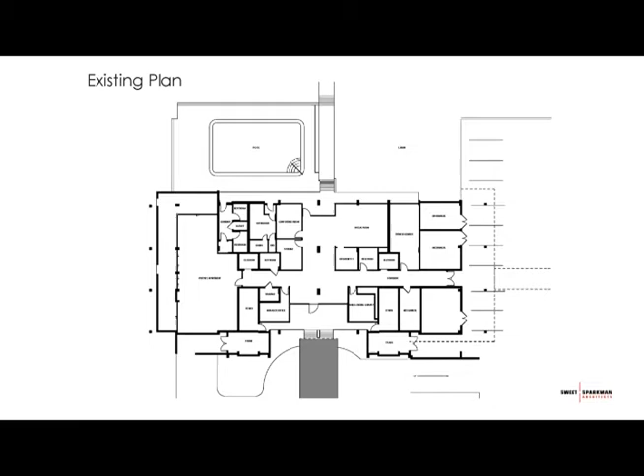So this is the existing floor plan right now. We are in here, in this room here. And what we noticed — the first thing that we did was really look at the property as a whole. Before we start working in the lobby and the areas that were going to be the first phase of the project, we wanted to look at the project holistically.

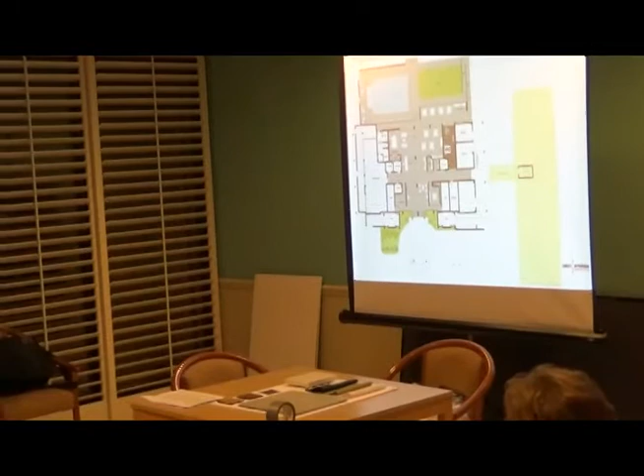Some of the things we thought we would do — you mentioned this in your consensus project — the covered area, probably painting that so it didn't look like so much of an addition, but started to look like it was part of the original building. The connection right now is a little bit temporary looking, so we want to do something more permanent, connecting the carport to the north side where everybody comes in.

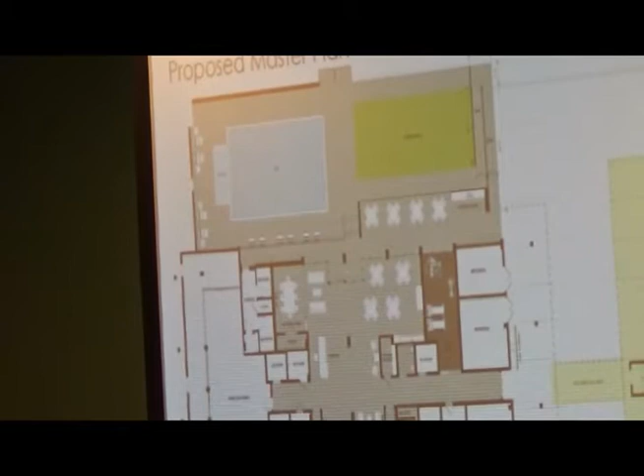And then we look to capture and make better use of the pool deck and this grass area right outside here, which is really underutilized right now. We would propose that maybe someday we turn this into an area which can be used for exercise, sunbathing, sunsets — so this could really be a more functional multi-purpose area.

We also saw — that's my New York, excuse me — we also saw the opportunity to get some outdoor seating, which would sort of connect the inside to the outside.

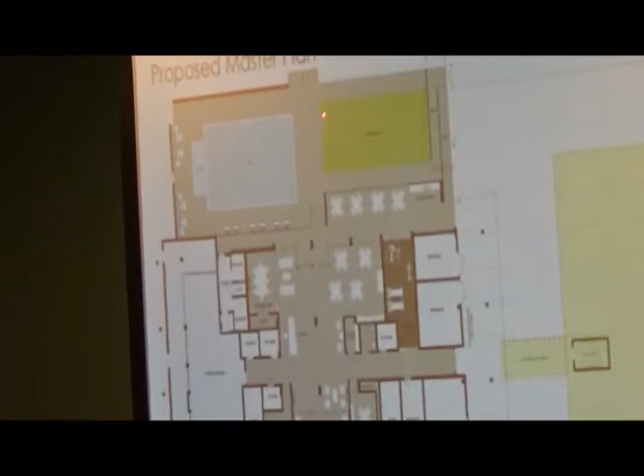Once again, we wanted to make sure the whole project is universally accessible, so we wanted to make sure we had access from the lower deck to the upper deck. We're also providing a ramp here to access from the lower to the upper, with an outdoor kitchen.

So these are all things — before we really started studying the interior of the space, we wanted to make sure we were looking at it holistically.

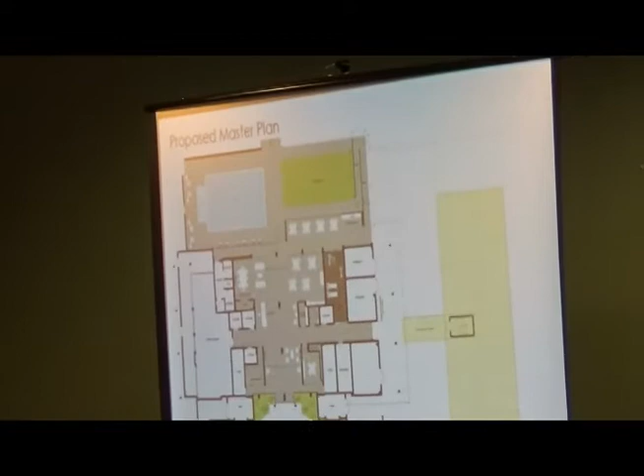Landscaping was also something that we looked at, and we would propose that maybe we do improvements to the landscaping out here in the drop-off area at the wall. We spent a day with Barbara Mims, and we walked the site, so we feel like we better understand what works here at Embassy House, what doesn't work, and maybe some ideas for future landscaping that complements the architecture.

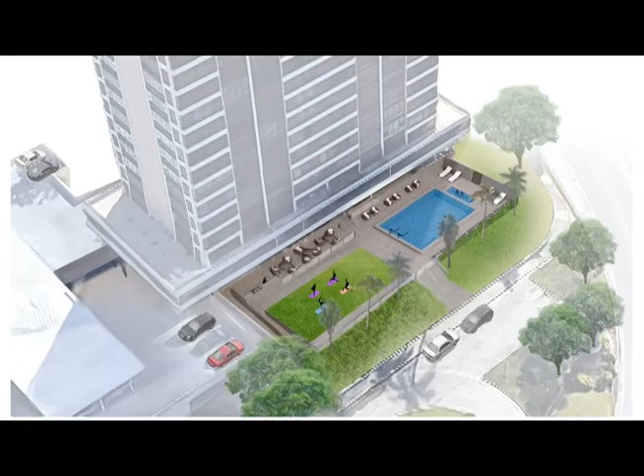So this would be an aerial view from the west. This is the existing pool. Perhaps in the future we do improvements to the pool, perhaps we add a spa, or an area here with grass where we can do yoga or sunset viewing, a multi-purpose space, so we can capture the use of that.

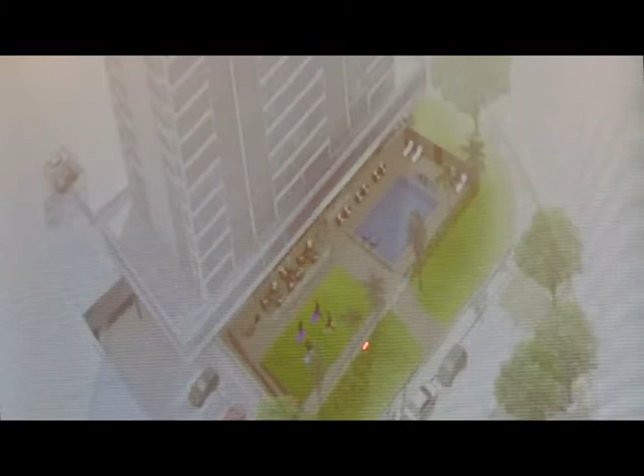We're also looking to enhance the security. Maybe we provide a gate and a fence along here, and maybe there's a glass rail here so we get views across. The road here is lower, so you'll get unobstructed views across to the sunset, to the water. So that's what we would propose.

Here's that seating that's at an upper level, but the same level as the lobby. And then this is the connection that we're proposing, which would be very similar to the connection on the east side of the building, the carport you have right now, which is very straight, sort of mid-century. There's no swooping curves or anything like that. It's all very orthogonal, which is very indicative of the mid-century modern style. So we would suggest that we try to take the architecture that was originally done and match it with some of the other amenities we're proposing.

Once again, in the future, this is just something that we looked at when we started the project.

Like I said, we met with Barbara, we toured the landscaping. We know what works, what doesn't. We know it's a harsh environment here because of the wind at your location. But we would also suggest that maybe we start looking at some other plantings. We know that variegated ginger works very well, lady palm works very well. But we would propose that, and we have some planters which are more indicative of the mid-century modern style of the building. So these are just some suggestions.

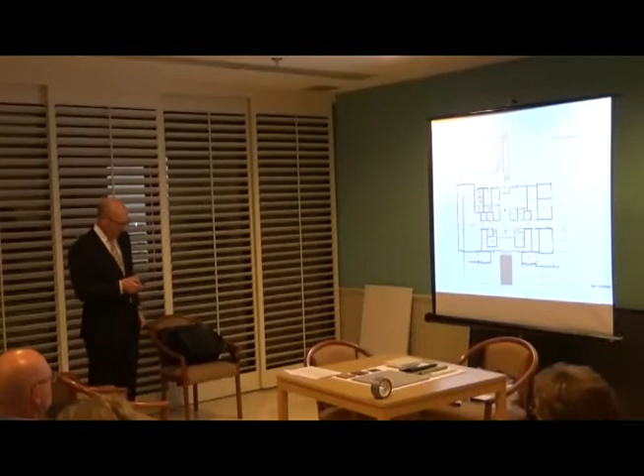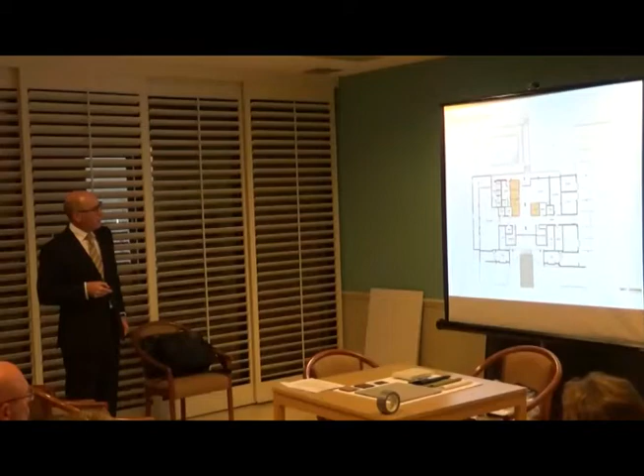One of the things we saw in your consensus report was you wanted a clean, open, modern feel. We thought the greatest attribute, when I first came in here, was the view directly to the west, and we thought what was really pinching that view were these rooms here. Because when you walk in, you've got this open space, but then it narrows down very quickly with what is the kitchen, which we came to realize is maybe an underutilized kitchen, and then a storage room. And then there was this area here which was not used at all.

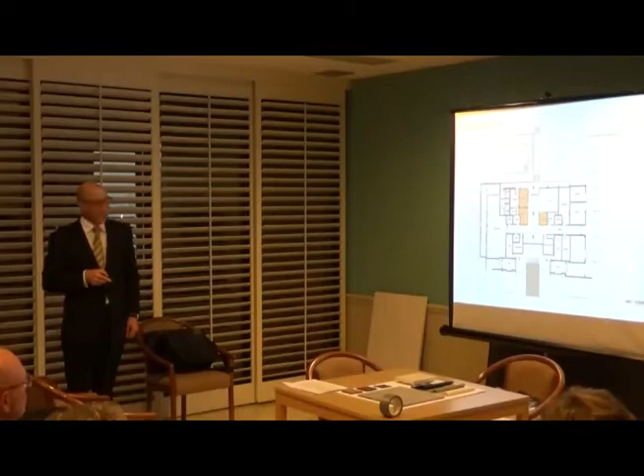That's your pool bath, which you did a nice renovation on, but this area right now is vacant. We're going to take over that space and utilize it, and we think we could move some of this space into here, with the idea to really open the lobby up, make it feel much more open than it is right now. I think we can do that by removing some rooms and finding other locations for them, or making them just slightly smaller rooms that you don't utilize as much.

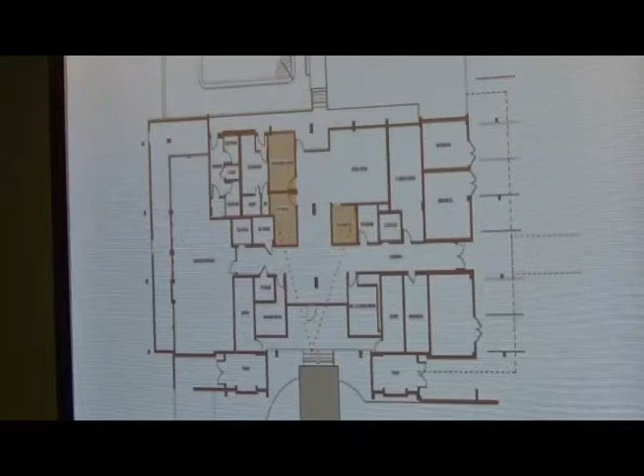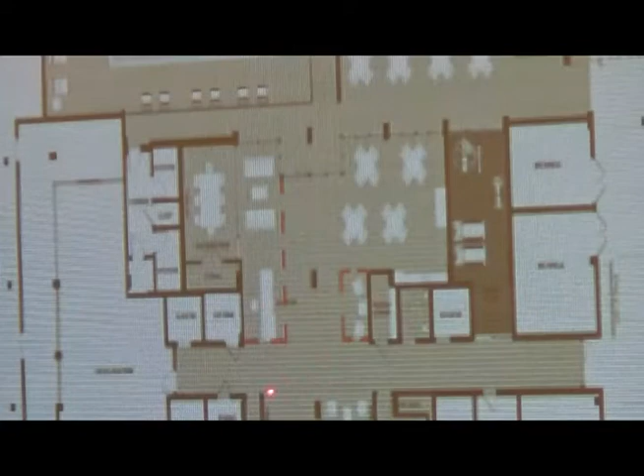This is a floor plan, and the red dashed lines show what those spaces were that you had, and we're going to open that up. We would propose to open that up and create, maybe move the reception so it's not right on you when you walk through the door, and it's floating a little bit so you can see past it. And then we have more seating areas, just informal seating areas.

So that would become your view. If you see the red lines, your view would really capture all that glass which is currently here. So when you walk in, you're immediately going to see the water and the sunset and everything, instead of looking at the back of the kitchen. Right now, if you look through that glass, that area here is the kitchen, and this area here is the storage room. And you get very little view of the outside to the west.

What we would propose is that same view, your same angle. Here you're coming up the stairs, and here you're coming up the stairs. We removed all this, and we removed all that, and now that's what we really want you to see, is the view across the storefront that's here.

What else we would propose is to change the flooring material. Although I like polypebble, it gives you a dated look. I think the other thing we want to do is go from inside to outside. That's a real tenet of the Sarasota School of Architecture, to blur the lines between inside and outside, so your view and experience flows from in to out. That's what we're proposing: we'd take the flooring and run it outside to the east side here.

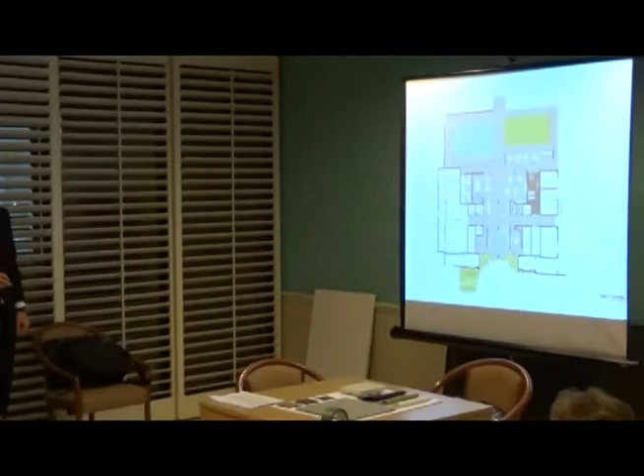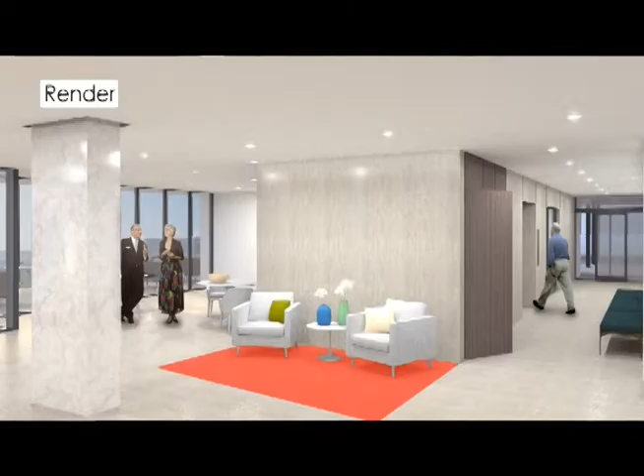Okay, so I'll show you another view. Now we're standing in the hallway back here, looking across. We're going to remove the kitchen and tuck a new kitchen on the other side, but that's the view right now. Once again, it's really protruding into the space, so we'll suggest cutting it back a little, so you can capture the glass, and then do something low maintenance and durable on this volume—sort of an accent treatment on this wall.

So this is a new storage room, this is the elevator, this is the door to the fitness room, which we propose becomes a glass door to allow more light and make it feel less claustrophobic. We're also suggesting we clad the columns for a more durable material, and maybe do a bit of detailing around the columns, and around this as well.

Your consensus report suggested raising the ceiling here would be ideal. It's unlikely we'll be able to raise it, since there's a lot above and the structure isn't much higher. But if we can give the impression that this volume goes up, that's what we'll try to do—little details like that help give volume to the space if we can't capture that additional height.

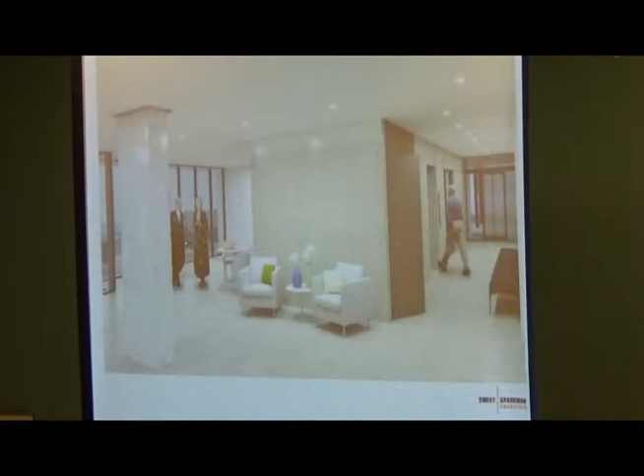You'll see here, this is the door on the north side—we're also proposing to change that door. There was a question previously about whether changing the door means we have to bring everything else up to code. The answer is we only have to bring up to code where the structure starts and ends at that opening, so we don't have to bring the whole building or all the glass up to code. We do not have to do that. This is another view—now we're standing where I am, looking back towards you.

So we're going to look at the reception area and also that space which was the restroom, which is vacant right now, not occupied. That's where we're going to put a little conference area.

So that is what I'm looking at now without you in it, and that is what we would propose. So this is a sort of floating reception area. This is the backdrop for the reception.

Nicole has been doing a lot of research, and this is actually your stair tower design. So if you look on the east face of the building, which is a lot of mid-century architecture, you just showed me an article recently about celebrating block. They use block in decorative ways, just the way you do on Embassy House.

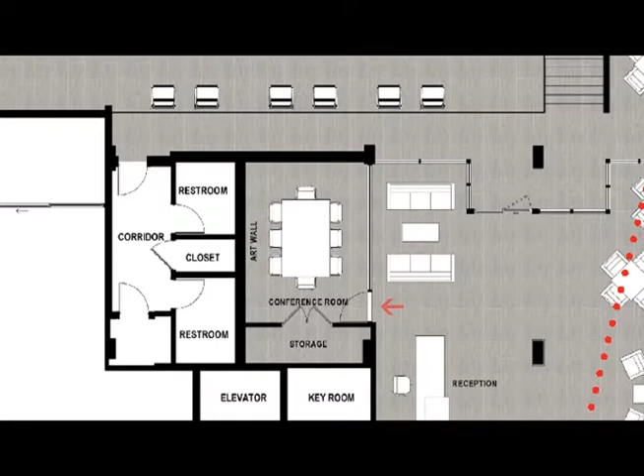And this is the entry to what will be the new conference area, which will be glass, once again a glass wall we would recommend, just because you can feel how tight the space is. If we can make the other spaces a little more transparent with glass walls, the space is going to feel so much larger than it is.

So that's our plan, but this all remains the same, all this glass. In fact, that right there is what that is right there. We're not proposing to do anything here.

We would propose maybe doing different shades here. Right now we're proposing Mecho shades, which can come down and go up, once again giving you unobstructed views to the west.

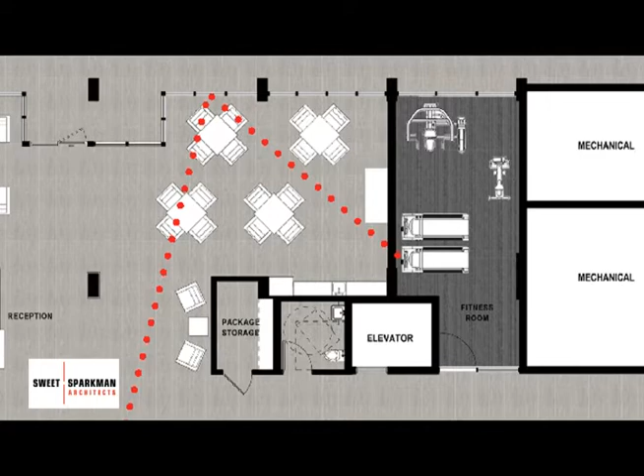So I'm going to show you a view standing here and looking back this way, because once we remove the kitchen, we need to find a new place for it. So we're proposing that we just do a bar top, which will have a sink, a refrigerator, microwave, but we make it all part of this wall feature.

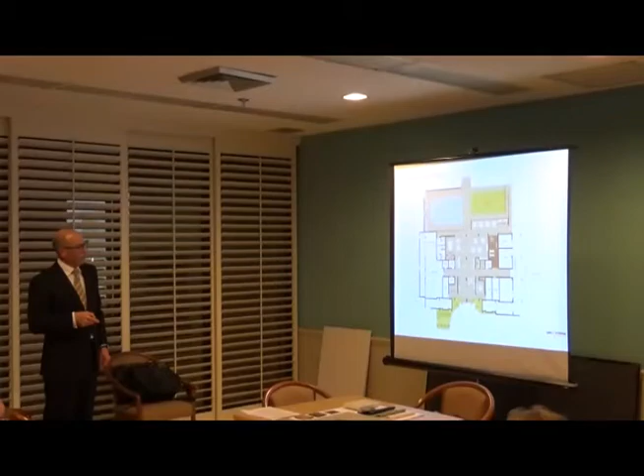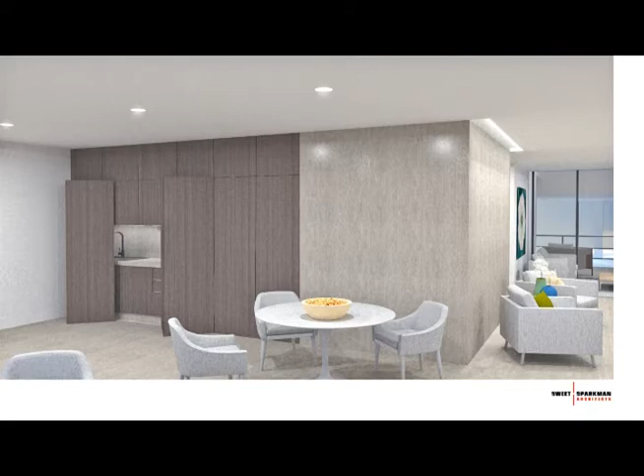So that is what is there now, and that is what we would propose, that this kitchen could essentially disappear when you're not using it, and then you can open up and use it when you need it.

So I'll take a stab at this, Nicole, and you can fill in. So when Nicole was looking at furniture and lounge seating, you'll see we looked at a lot of Florence Knoll. Florence Knoll was a furniture designer in the 50s, mid-century modern furniture, beautiful furniture. And some of the furniture that you have there, some of the benches, we actually tried to reuse, and we're going to in some of the images.

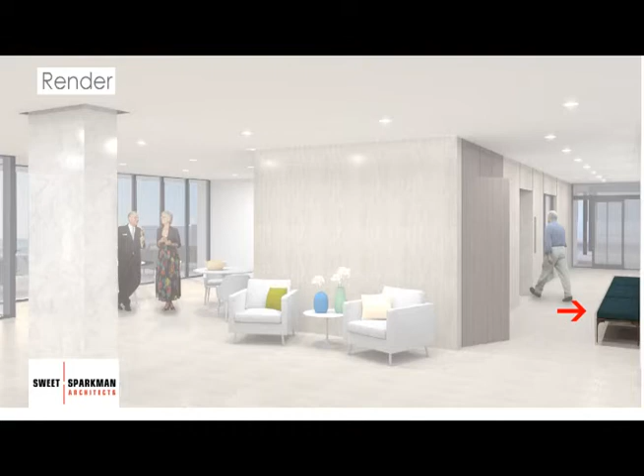So the bench that we're showing here is actually the bench that you have. We would recommend that we strip it down, refinish it, put new padding on it if we need to, but that's a beautiful piece of furniture.

The other furniture is just simple modern furniture that we hope will be stylistic for years to come. It doesn't really fall out of style, and that's what's so nice about Knoll furniture.

So Knoll furniture is beautiful, but there are other manufacturers in the same mid-century modern style, not just Knoll. So these are the pieces that we're recommending you use, and right now we're going to go through a little bit about a budget and show you the cost. Right now we just have an allowance for furniture, but everything we're showing you we believe we can do within that allowance amount, which we will show you.

So the furniture in the conference room, and in the social room. Anything you want to hit upon here, Nicole?

Before we get to cost, I want to make sure that we kept the mail room and the mail slots in the same location, so we didn't touch that. The consensus was that it was fine where it's at, and that room serves multiple purposes — it's the mail room, but we will also propose maybe putting social seating in there as well, so we can utilize that space a little more. So that all remained the same.

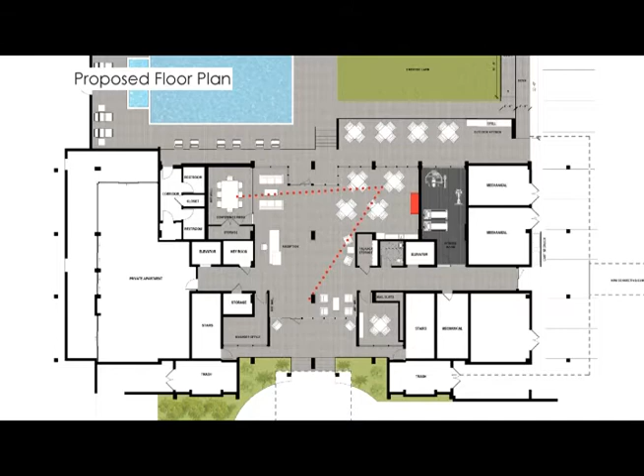The fitness room stays. We would do new floor surface, new ceiling, and we would make this a glass wall and a glass door. And this would also be a glass wall and a glass door. So the idea is to capture all of this space, make it all feel like it's all open.

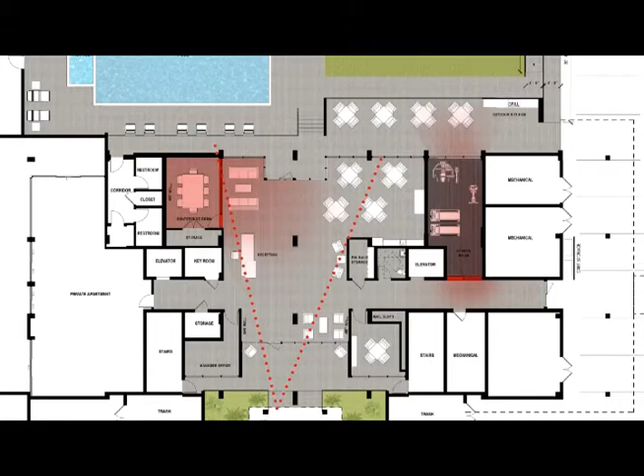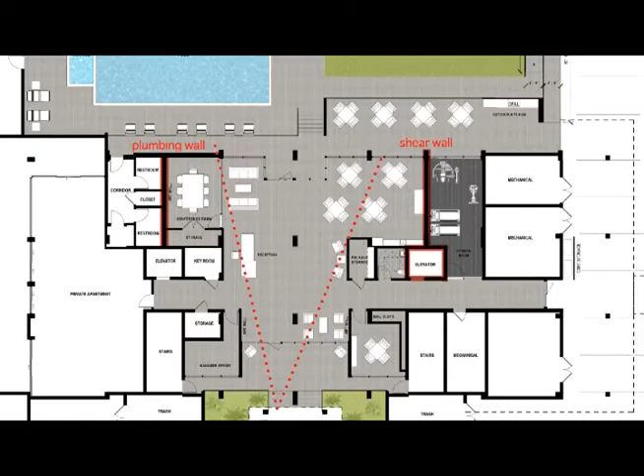Todd, I'm sorry to interrupt, but you just might want to mention that you had the constraints of those walls that could not be moved, in terms of trying to capture any other space. That's a good point. So right now, this is a shear wall, this is a part of the structural system for the tower. We looked at putting openings in this wall, we looked at moving things, but that wall is just going to be far too expensive for us to do anything with, so we kept that in place. This is a plumbing wall, and that may also be a shear wall as well, so that was too expensive. So we're really trying to limit, we're trying to grab the low-hanging fruit to make the improvements.

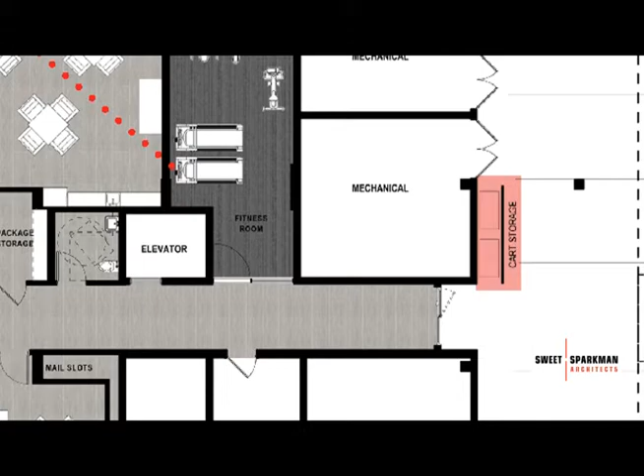So there will be a spot for that? Yes. Okay, and I just had one other question - have you designed other condominiums in the Sarasota area with renovations like this? We were involved in Courthouse Center, which is downtown. Recently, we have not been involved in renovations to condominiums, but we've done quite a bit of renovations.

Some of the things that I mentioned, as you said, are going to cost more than that $10,000. How do we find out if people are interested in those additions? That's probably something that Scott and the facilities committee would probably spearhead. Thank you. Thank you.

Okay, young lady in the back. Thank you. I was wondering if part of the budget included a project manager to oversee the work. It seems like our wonderful staff here is quite busy already keeping up with all of this. I just wondered who is going to execute this, and where is it in the budget.

Yeah, it includes a project manager for the contractor as well as for the architect, so there'll be project managers for both of those disciplines. And will they be on site every day, or? Well, this also includes a superintendent who will be on site and a project manager. I would say the superintendent would be on site, the project manager probably not as often as the superintendent.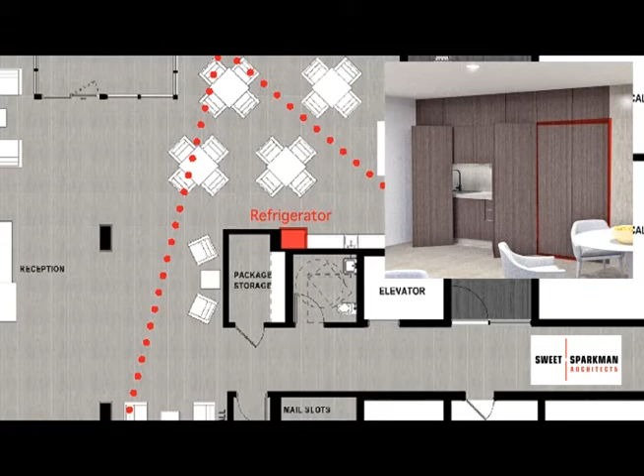Yeah, it's not in a room, it's really along that wall, but it's recessed into that wall 2 feet. That wall is the back of the elevator shaft. And the bathroom, that's the bathroom. Yeah, we are taking, there's 2 feet here that we're adding onto the back of the elevator shaft, right there. And regular refrigerators don't fit in there. They make counter depth refrigerators.

I see what Jack's saying. In that corner, that might be part of the elevator thing, so we might have to adjust at the end. Yes. Well, this is out of it, a little bit. Right, well, that's what it showed on the plans anyway, right? And so again, it's sort of that concept discussion, I think that's the point we're at. Yes, that's the design, that's our plan. If it turns out that when you knock into the wall, of course, before you actually knock into it, but if it really turns out that you can't put that there, that's going to have to change a little bit.

Maybe that kitchen is a little shorter, maybe the refrigerator is a smaller one. I mean, we don't use the refrigerator and all that stuff. Well, you've got a number on one. Right, yeah, like if this needs to move over here. Maybe the back of the storage closet is a little shorter. So it's those kinds of things, but I get what you're saying. Yes.

Those 4 white boxes on this side of the grassy area in the back, where you're standing, is that going to be extended out? Is that going to have seating on the outside? Not in this phase, that is part of the larger big picture, that's what we would propose, but it's not part of this project. When we're looking, the green space is really a wasted space, we don't use it for anything. It's kind of a shame.

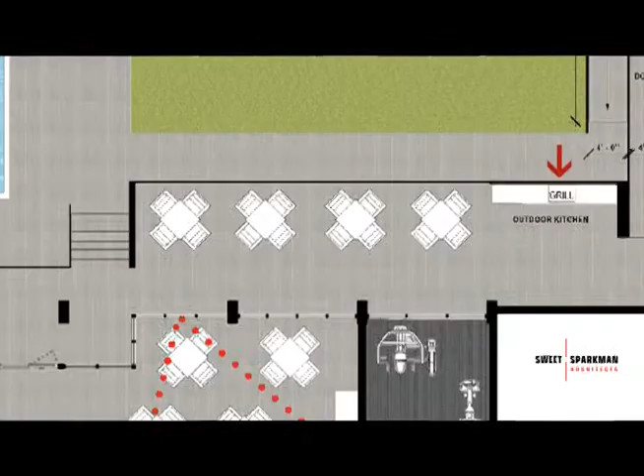Does the access ramp there take away from where the grill is right now? Well, I think the grill is over here — no, I think the grill is here, actually. Yes, okay, then the answer is yes. We're going to take that area, that grill, and this becomes the outdoor kitchen with the grill, and this becomes the seating.

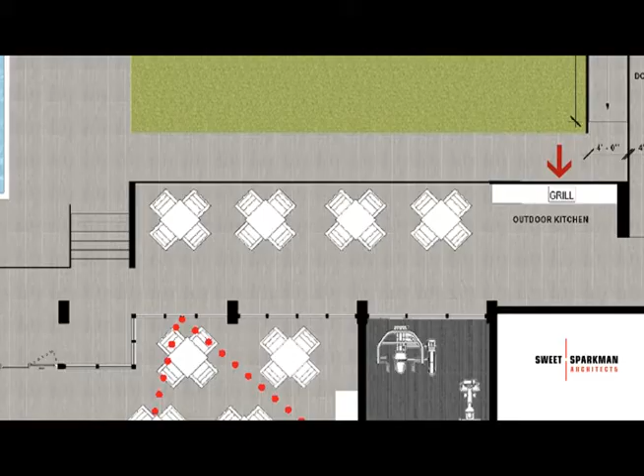What happens to the fuel storage tank that's out here? You've got an LP gas and a condenser unit, and we would relocate those. But that's all phase two, right? That's all phase two, correct, that's all part of the long-term plan. Oh, okay, yes.

I think you've done a fantastic job of sticking within the budget that we said is our top, and giving us an awful lot. Although some people have some good thoughts for tweaks, and I, for one, would also love to see the outdoor deck out here in some way, to stay within the budget, which was the vote of last year as our max, you have done that with a contingency. That was the task, and you've done a lot with that. I'm excited, I think this is great.

I guess I would encourage the building committee to move forward quickly, because inflation might kick in on the $10,000. The $10,000 is not indexed for inflation, so if your hard cap is $10,000, you better move quick.

That's a really good point, because a lot of times estimates come with a contingency, and they also come with escalation. Right now the market is crazy, and it's hard to predict where pricing is going to be. The contractor we chose to do this estimate is doing a lot of work, and they work with subs that continually work with them. So we feel comfortable that we're giving you a reliable estimate.